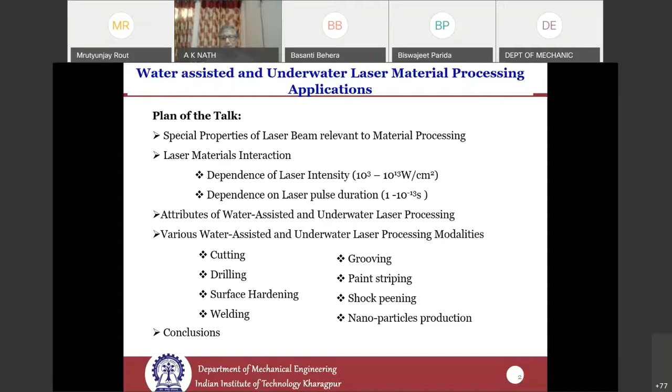The laser has become a tool of unprecedented precision and power, and because of that, it has become an invaluable tool for material processing applications in manufacturing industry.

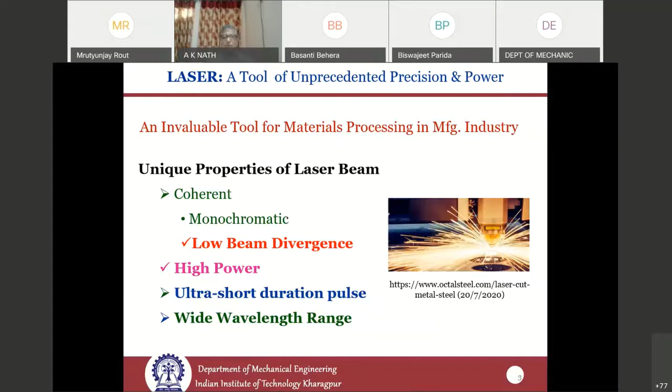The unique properties of the laser beam: many people know it is coherent and monochromatic. The spatial coherent property gives the laser beam very low beam divergence, meaning it doesn't spread much while traveling. You can get very high power, very short duration pulses, and lasers of very different wavelengths ranging from infrared to ultraviolet.

What is the significance of this? When we have such a laser beam and try to focus it with a lens of focal length f, the spot diameter generated is given by diameter equals 2f times the half beam divergence, where f is the focal length of the lens.

If you put in the typical values, the smallest spot diameter you can generate is of the order of the wavelength of the laser. For excimer lasers, with wavelength in the range of 0.2 micron, one can get a 0.2 micron diameter spot.

With an Nd:YAG laser, around 1 micron wavelength, the spot diameter will be 1 micron. With a CO2 laser, operating at around 10 micron wavelength, the minimum diameter at the focal point will be around 10 micron. So depending on the laser wavelength and beam quality, you can achieve very small spot diameters.

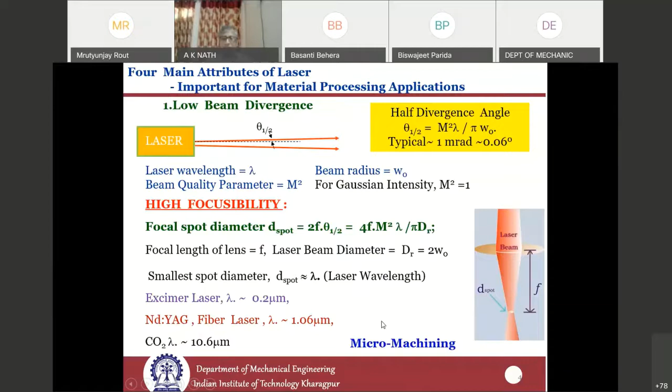Nowadays high power lasers are available in milliwatt range. The pointer we use for presentations is in the range of 0.5 milliwatt. Then you have got lasers ranging up to 10 kilowatt or more, tens of kilowatt, available commercially.

When you use pulse lasers, you can get pulse power in the kilowatt to terawatt level, with pulse energy up to hundreds of joules in a single pulse. Once you focus such high power laser with a lens, you can generate a focal spot diameter practically in the range of 10 to 100 micron minimum spot size, yielding power density at the focal spot in the range of 10 to the power 3 watt per centimeter square to 10 to the power 14 watt per centimeter square.

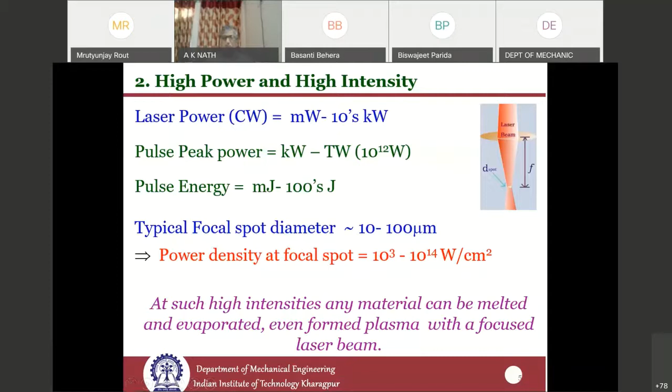There is no other energy source which can generate such high power densities. Lasers are available from continuous wave mode to different pulse durations. The shortest pulse duration practically generated and commercially available is around 10 femtosecond, that is 10 into 10 to the power minus 15 second.

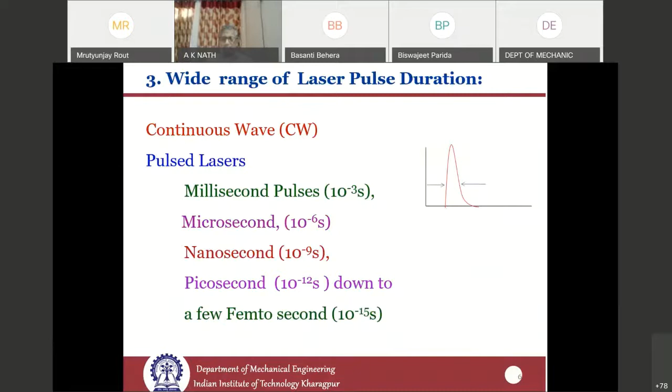Lasers are available at different wavelengths, ranging from ultraviolet lasers like excimer lasers, up to large varieties in the mid wavelength range. The most important lasers used for material processing applications, where reasonably high power and pulse energy are required, include excimer lasers, Nd:YAG glass laser operating around 1.06 microns, fiber lasers in the same range, titanium sapphire lasers operating as femtosecond lasers, and CO2 lasers. So CO2 laser, Nd:YAG laser, fiber laser, titanium sapphire laser, and excimer laser are the very important lasers for industrial applications.

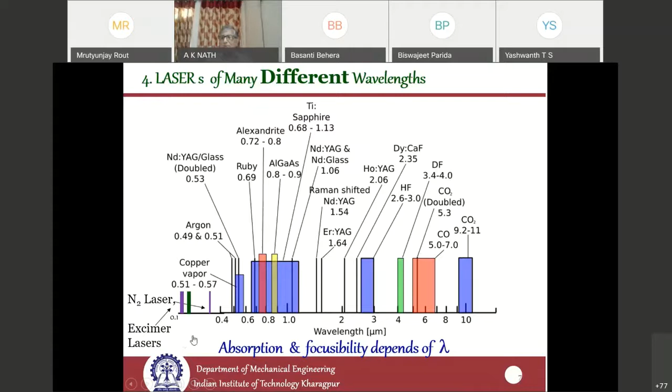When you focus the laser beam, depending upon the power density, you can realize various effects on a material. If the laser power density is in the range of kilowatt per centimeter square, relatively low, you just heat the material, realizing laser surface hardening and metal forming, without allowing the surface to melt.

If you go for higher laser powers in the range of 10 to the power 5 watt per centimeter square, you can do melting. This can be used for laser surface remelting, cutting, conduction welding, as well as surface alloying, etc.

When you go for slightly more power density, the melt material can start evaporating, and the vapor pressure generated can create a keyhole. Through this keyhole, you can realize deep penetration welding as well as drilling.

When you go to even higher power densities, in the range of 10 to the power 7 watt and more, the vapor coming out can form plasma. When the plasma absorbs the laser radiation, its temperature rises very high, so pressure also increases, generating a lot of shock wave. This shock wave can produce shock wave hardening, known as laser peening.

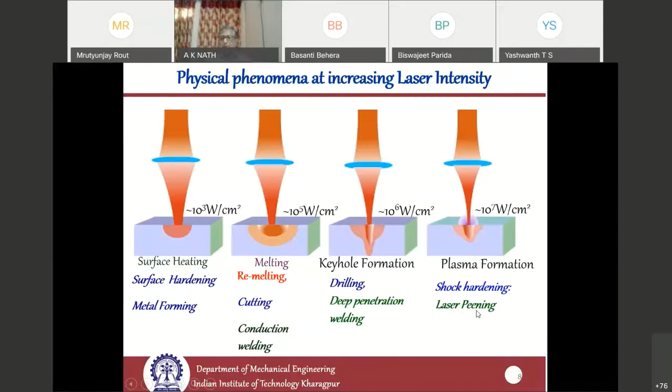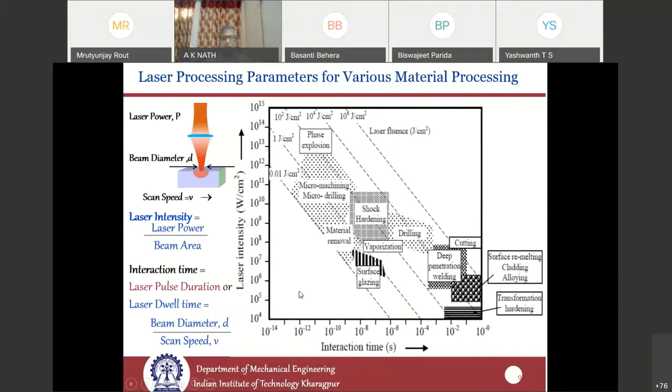Now, how does the laser beam interact with a material? To understand laser beam interaction and appreciate its dependence on laser intensity and pulse duration, let us see what happens when the laser beam, which is basically an electromagnetic wave, is incident on a material. If you consider a metal, it has a lot of free electrons.

These free electrons will be forced by the oscillating electric field of the laser beam and will start oscillating. As they oscillate, they collide with other electrons, sharing their energy, and thereby the electron gas system temperature increases. This increase takes place on the time scale of around femtoseconds.

These hot electrons, heated up to several hundred or thousands of Kelvin, then collide with the much heavier ions, which slowly gain energy from the electrons and share that energy, so the entire system gets heated up. This process takes place on the order of picoseconds or tens of picoseconds.

So if you see the ultra fast laser operating in sub picosecond regime, only the electron temperature is going to get heated up, and the ion temperature will be very less, because the ion will not be able to thermalize with the electron within the femtosecond time scale.

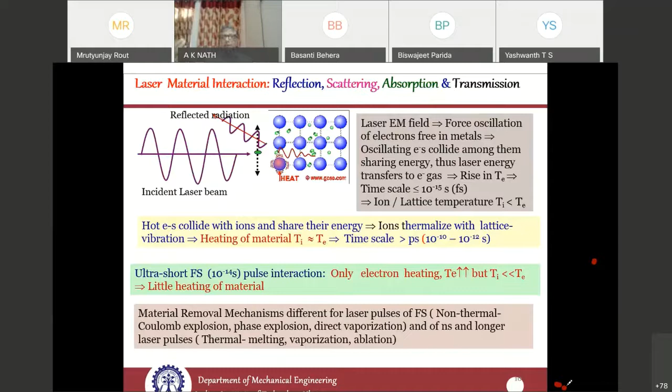But when you consider metal, where there is a lot of free electrons, the refractive index is complex, and it has got a real part and an imaginary part.

Depending upon this refractive index, reflectivity is given by this expression, and absorptivity is nothing but 1 minus R, the reflectivity, and the transmittivity.

In case of metal, which are opaque, the transmission is 0, so you get absorptivity in the material equal to 1 minus R.

So absorptivity depends on the complex refractive index of the material, and on this also depends the absorption or attenuation coefficient.

This alpha is a characteristic of both the laser and the material, given by 4 pi k by lambda, where k is the imaginary part of the component of the complex refractive index.

The inverse of this tells me how quickly the laser energy is going to get absorbed within the material. So it is known as the attenuation length, sometimes also called the optical skin depth.

In metal, the k value is usually large because there are a lot of free electrons available. Because of that, the reflectivity R tends to become almost 90% or even near 100%, and the absorptivity, 1 minus R, becomes very, very small.

And there the attenuation length is also very small, in the range of nanometers. So what does it mean?

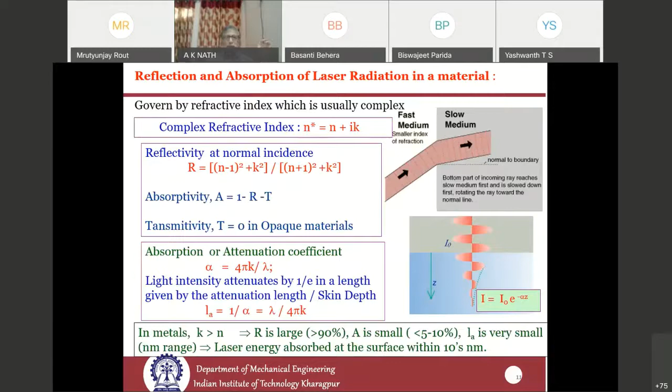Okay, so when we have got the dielectric material.

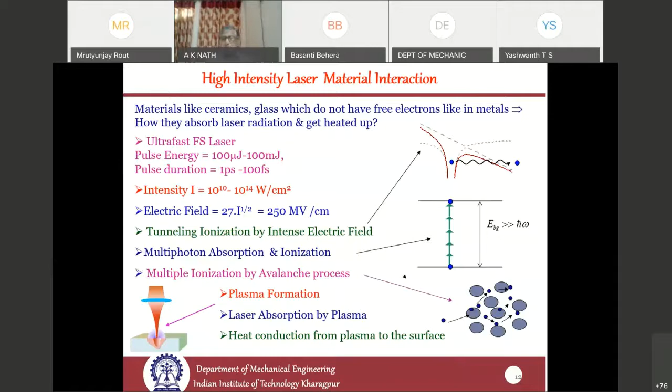But with a very short duration pulse, the electron system gets heated up in that duration, and slowly, over a timescale of tens of picoseconds, shares its energy with the ions and lattice, which then also get heated up. All of this happens on the femtosecond timescale.

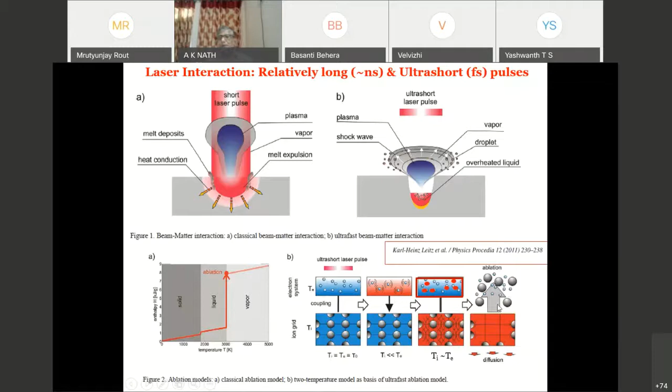There is no time for the material to undergo thermodynamic melting, so some amount of material that has been heated up to very high kinetic energy just leaves the material - what we call ablation or vaporization without melting. That type of effect can happen.

So if you see the effect of nanosecond and femtosecond pulses - with microsecond and nanosecond pulses, you see a lot of recast or molten material. But when you go to picosecond laser pulses and shorter, you don't find that effect of molten material.

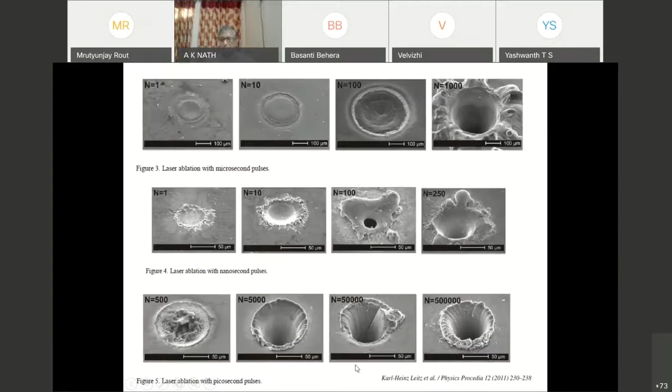How does the processing take place? As mentioned, the laser beam gets absorbed on the top surface, and the entire energy gets absorbed there, with heat conducted into the material. One can find out how the surface as well as the material heats up along the depth direction by solving the one-dimensional heat conduction equation.

From this, one can find out for a given pulse duration how the surface temperature rises and how it cools down. Along the depth also, you can find out how the temperature distribution takes place over time.

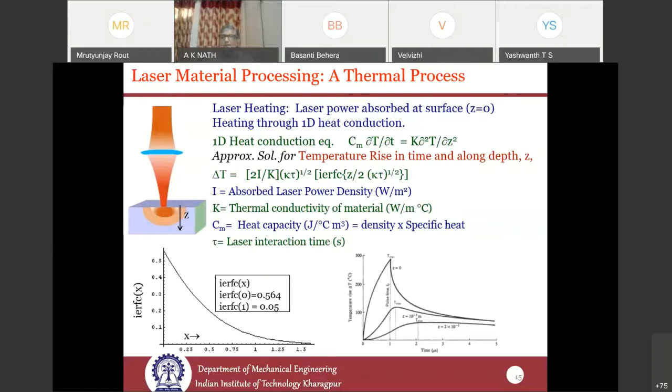But when we consider the ultra-short laser pulse, we know that only the electrons are getting heated up. So we have the electron heat conduction equation, and they slowly share their energy with the ions - this is the equation through which the ions get heated up.

So if you want to find the temperature rise of electrons and ions and the material removal, it becomes a very complex process. People have tried to utilize empirical relations taken from experimental information.

One can find that there is a certain threshold of laser intensity, or laser fluence, up to which the material gets ablated. So if you have an intensity or fluence F0 incident on the surface, one can find out the threshold depth up to which the material gets ablated.

This can be found from this expression - the threshold depth is where the intensity has reduced to the threshold value. So from this equation, taking the log, you can find the depth up to which the material gets ablated.

Here, our assumption is that the laser intensity heats the material and is absorbed at the surface, and up to a depth governed by the optical skin depth or attenuation length.

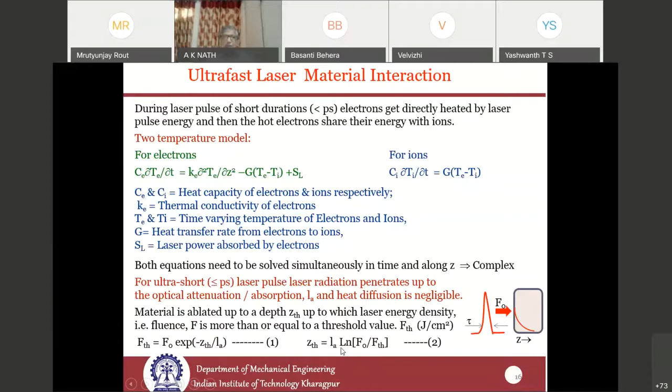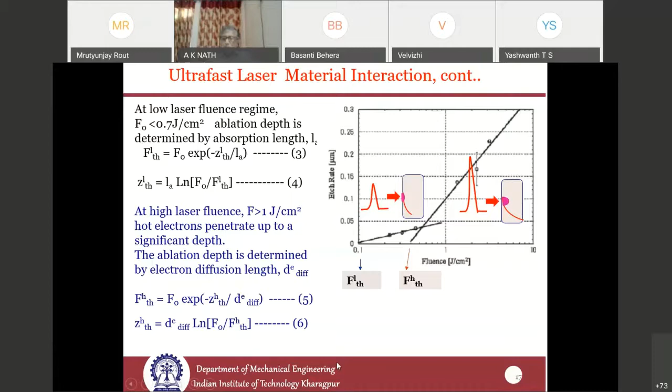When we consider very high intensities, we found there is a certain amount of hot electrons that cause diffusion inside the material, and this process is also very fast. Therefore, instead of optical attenuation length, the depth is governed by what is called the electron diffusion length. The expressions remain the same, only now we have a different threshold for high intensity ablation compared to low intensity ablation. Based on these experimental results, people have tried to theoretically model and find out, for a given laser fluence, what is the depth up to which material is going to get ablated.

However, when we consider normal laser cutting, drilling, etc., where the process is reasonably fast, not like femtosecond laser but still fast, the heat diffusion losses are very small and can be neglected. Then one can use the lumped energy or power balance equations, given here. This is the energy absorbed, and this is the amount of material which is going to get evaporated through vaporization. So this is the basic energy balance equation.

When we are talking about cutting, where the laser beam is moved with a velocity v, or distance v per second, you can use the energy power balance equations like this to determine how the temperature of the material is increasing, etc. You can find this out from this.

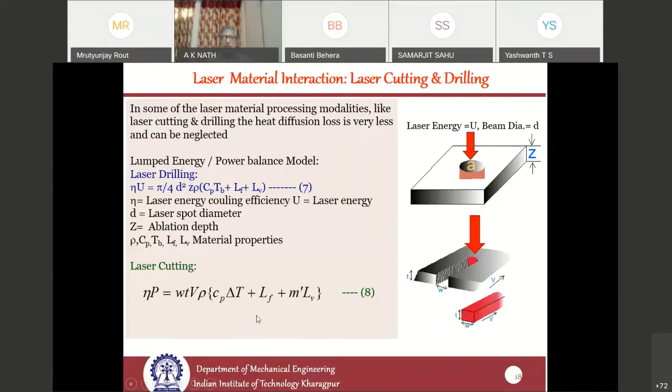Based on all these effects, one has tried to find out, for a given laser energy, how the ablation in grams depends on it. This line shows the lumped energy balance equation based on the previous equations I mentioned, for nanosecond and microsecond laser pulses, where the losses are very minimal. And here it is for femtosecond laser, where the phenomena are very different. People have tried to get information from experimental results and model it, using the three different models I discussed earlier.

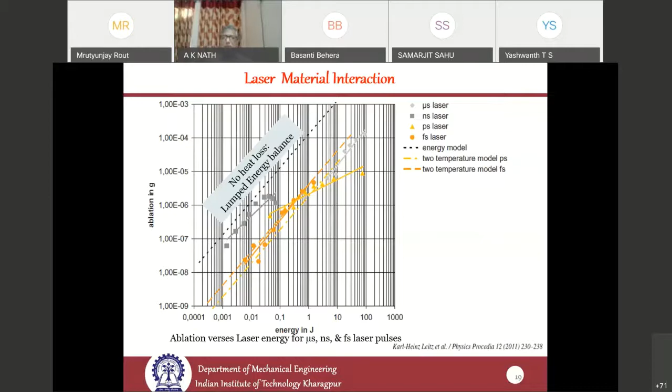Exploiting these effects, people have achieved thermal processing: cutting, drilling, welding, surface hardening, rapid manufacturing, that is additive manufacturing, laser forming, etc. There are also certain non-thermal effects, like in a dielectric material, a transparent glass, where inside the material you are able to generate features. This is laser shock peening. And this is the very advanced concept of two photon polymerization, through which you can generate nanofabrications.

This is the entire main building of our IIT complex, a 7-story building, made in less than a millimeter dimension, of the order of around 500 microns, seen under a scanning electron microscope. With almost 10 nanometer resolution, you can build this using the two photon polymerization effect.

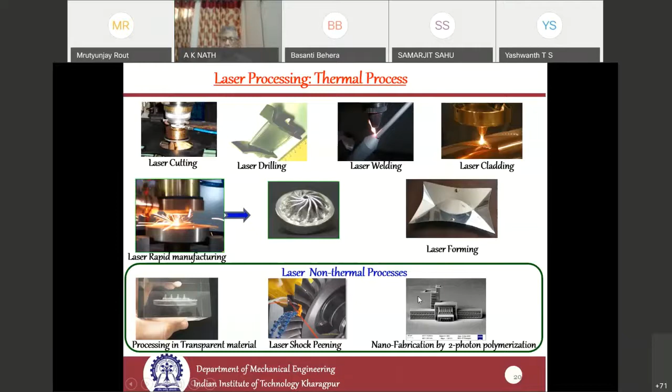Now, why is there a need for underwater processing? This need came from the fact that there are a lot of nuclear power stations where many components are flooded with water. Once the reactors are running, many parts become radioactive. And if, due to lapse of time, stress corrosion generates cracks, you need to repair them. Sometimes you have to cut apart the components, take them out, and rejoin with new components.

Also, the burnt fuel taken out from the reactor, in order to allow it to cool in terms of radiation, is put in a water tank around 30 to 40 feet beneath water, so that the radioactivity gets absorbed in the water. Now you need to dismantle these materials to take out the burnt fuel, process it, and store the waste material. How do you cut these materials, and do so underwater? These technical challenges drove people to find new methods and technologies based on lasers to do the processing underwater.

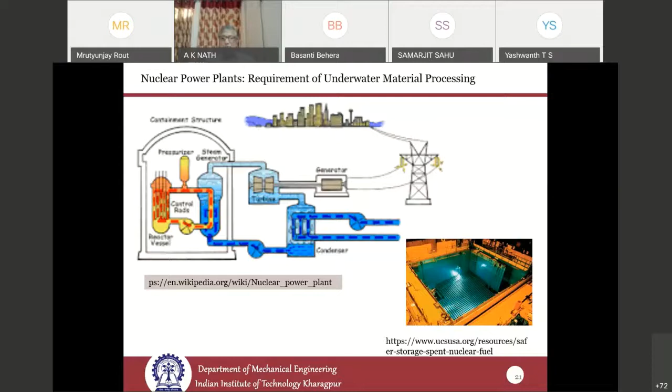So how does the laser beam get absorbed when it propagates in water? The CO2 laser gets readily absorbed in water; it has a very high absorption coefficient. Compared to that, on this logarithmic graph, the Nd:YAG laser, fiber laser, and diode lasers, whose wavelength is in this range, have relatively low absorption. The second harmonic Nd:YAG laser has relatively very low absorption. So one can directly use, inside water, the Nd:YAG laser, fiber laser, and second harmonic of fiber laser or Nd:YAG laser, to do the processing.

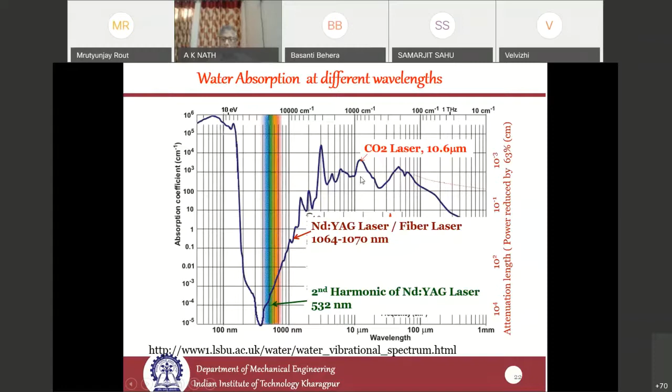CO2 laser has got limited applications, but as I go along, I will tell you how this has been exploited for use. In IIT Kharagpur, we have also tried to find out how the absorption of the fiber laser takes place when we focus the laser beam, because when the laser intensity at the focal point is very high, certain nonlinear effects take place and the water gets heated up. So we have tried to find out how, along with temperature rise, the absorption coefficient goes on reducing.

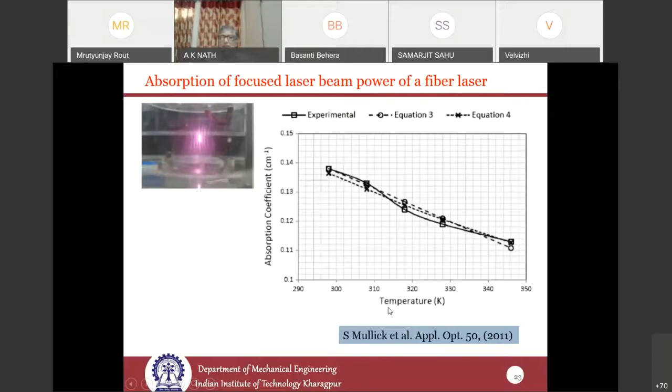Now, what are the attributes? What are the advantages of laser underwater processing? There are lasers like Nd:YAG laser and fiber lasers which have got very little absorption and better laser beam focusing. Because the refractive index of water is more than air, you get a smaller focal spot. There is also efficient cooling by the surrounding water.

The laser beam could be guided through the water jet. There is improved material removal by water jet because of high shearing force compared to gas jet, and it is used for cutting and other material removal processes. There is efficient material debris ejection by water vapor bubble cavitation effect, giving better laser processing quality because of the effective removal of debris.

Intense plasma is produced when we are using CO2 laser, and this has been also exploited in many applications, with enhanced plasma shockwave pressure due to water confinement. This is exploited in laser shock peening, which I will describe later. There is also reduced atmospheric pollution by waste gases and aerosols, because underwater, the debris or fumes coming out will be relatively less.

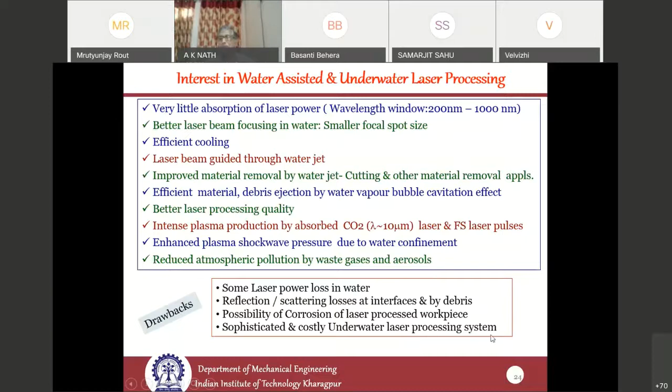There are some drawbacks. Some laser power loss in water takes place, along with reflection and scattering losses at the interface and by debris. There is a possibility of corrosion of the laser processed workpiece. Also, the underwater laser processing system is more sophisticated and costly compared to a gas assisted system.

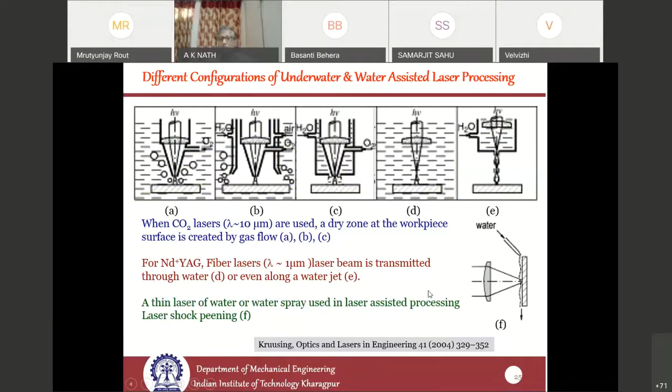And here, along with the laser beam, you are getting the water also, and we are creating the dry conditions and doing the weld processing. Here, it is inside the water, directly going through the water. And here you can see that the water layer is just put on the workpiece and laser beam is impinged on this. So these are the different ways through which it has been done.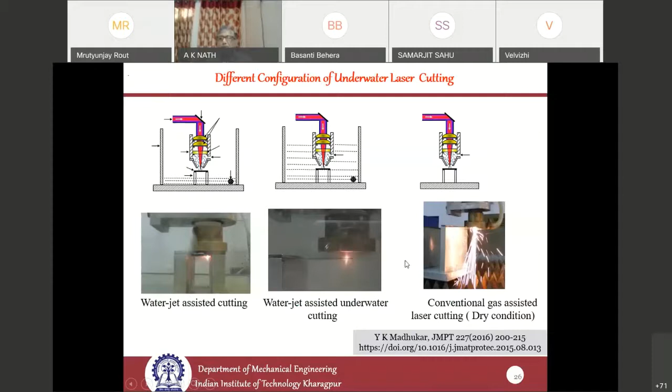So in IIT Kharagpur also, we have tried to develop water assisted and underwater cutting, as well as normal conventional gas jet assisted cutting and processing, and tried to compare the effect of all these processes. Here I will just try to demonstrate how it works. Let me see whether it works here or not.

You can see this is the normal gas assisted processing, where you can see that there is a lot of debris created, and noise and plumes are created.

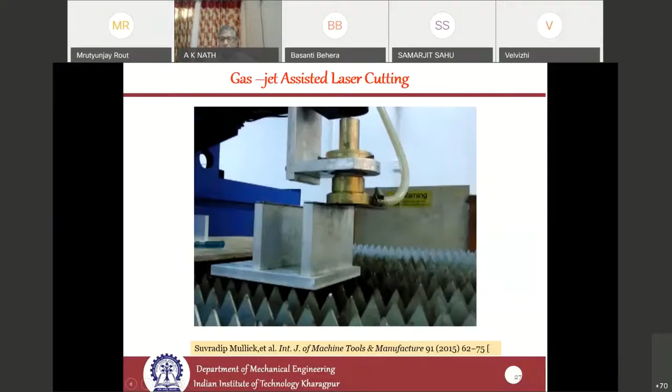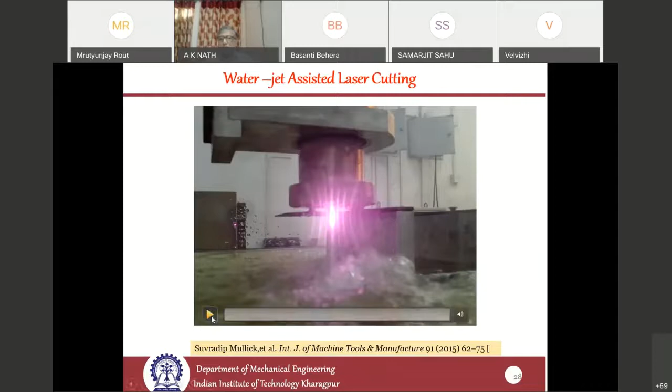Here it is the water jet assisted cutting. So the water is coming and it is removing the molten material.

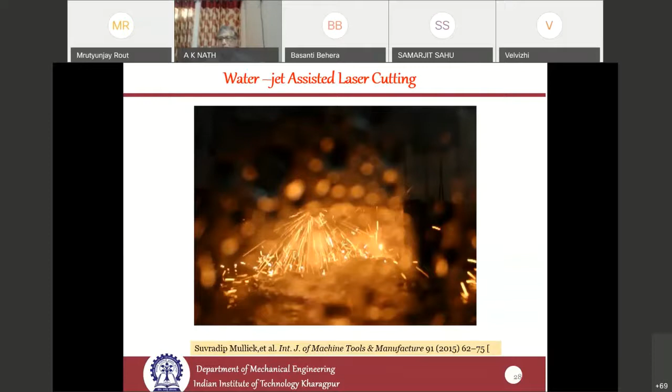Any difficulty, sir? Hello. Yeah, any difficulty? A K Nath sir, is there any problem? Yes, slide shifting was a little problem. Let me see.

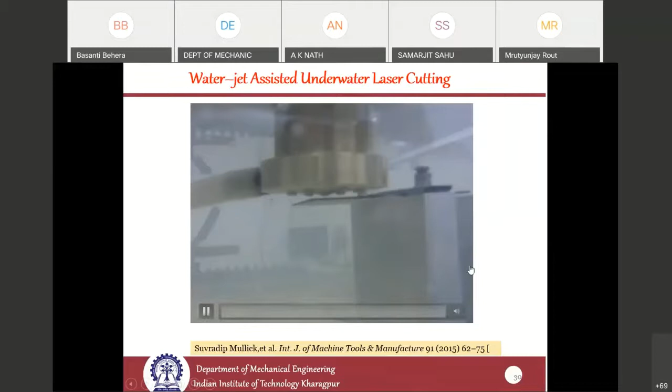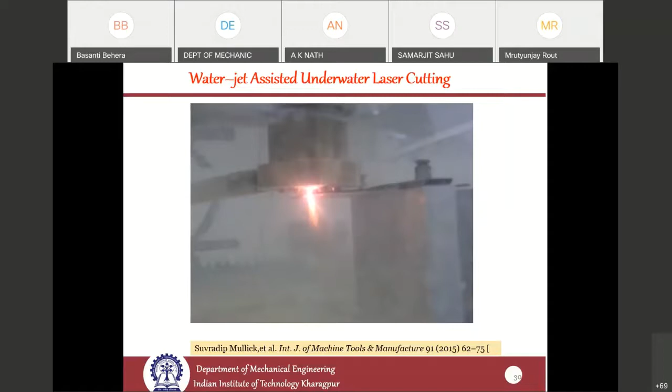Hello, Ashish sir, are you able to hear us? Yes, sir, we can hear you. Are you able to see the slide? No, sir, not right now. Let me share it again. Yes, sir, we can see your slides now. I'm trying to expand it, is it visible? Yes, sir, it is visible. I hope you were able to see this slide in play mode. Yes, sir, it is running. Again, some problem came, might be the bandwidth is low, it is not able to take video. Okay, I will go for the rest of the things. Are you able to see the slides now? No, sir, not right now. Oh, again it got disconnected.

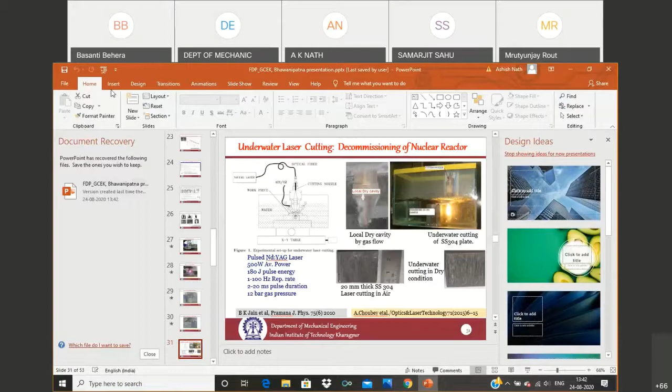Are you able to see this? Yes, sir, we can see that. Okay, so now I'm not going to show any video. So this is underwater cutting for decommissioning of nuclear reactor components.

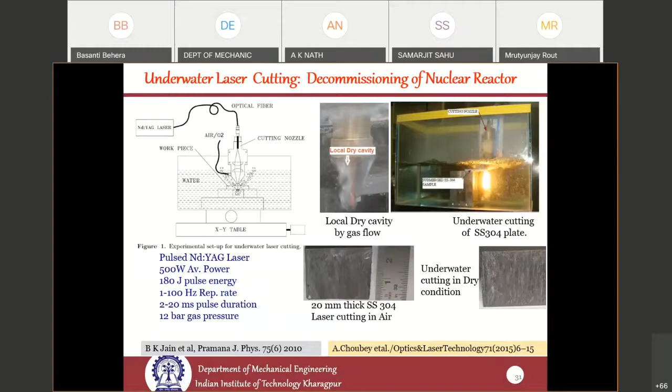As I told you, most of the time when CO2 lasers, which get readily absorbed in water, were available in the late 90s, by creating a local dry cavity with the help of a high pressure air or oxygen atmosphere, the laser beam used to be directly incident on the workpiece kept underwater and realize the cutting. This was being used in RRCAT Indore for the Indian nuclear program, these developments were being done. This is reported in Japan, how they are cutting even up to 100 millimeter thick blocks underwater by creating a dry atmosphere.

So here you can see the top cut, which is reasonably very small, and this is the bottom one. This is from the side. So from 80 to 100 millimeter material from the side, you can see how the cutting has been realized.

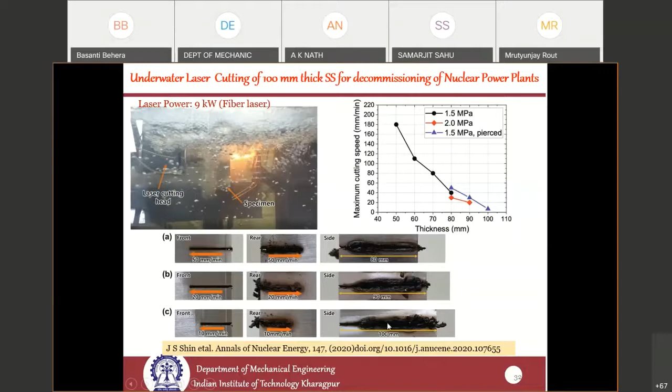Sometimes in the early 2000s, one interesting development was done when high-powered fiber lasers and NdYAG lasers were developed. Through a very fine water jet whose dimension is in the range of around 50 to 100 micron, the laser beam is guided through this, and then it is allowed to fall on the workpiece to do the cutting. Since the refractive index of water is 1.3, more than air whose refractive index is 1, at a proper incident angle, when the laser beam is focused, it can be guided like a waveguide and carried without much loss.

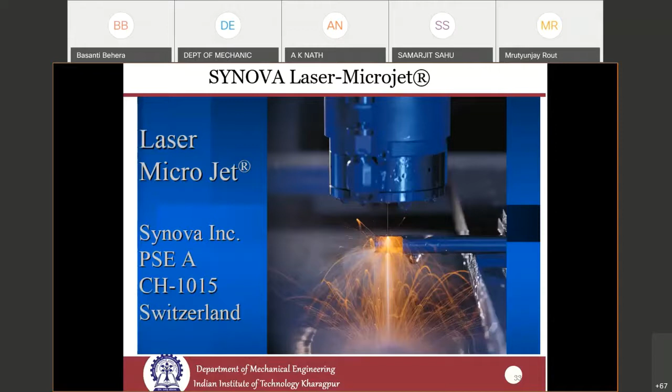So this was being developed and used for cutting many thin materials, slicing thin materials to create very good quality of cutting. Here you can see how the laser beam is guided through the water jet, and this is the laser beam focused. This is the water jet which is coming, and from here the laser beam is guided and it is going to cut. The main advantage of this is that water causes cooling, very efficient melt expulsion, and you can have long focal distance, because usually the focal point is limited after the lens, but if it is focused, it maintains the same focal dimension along the fiber water jet till it is incident on the surface.

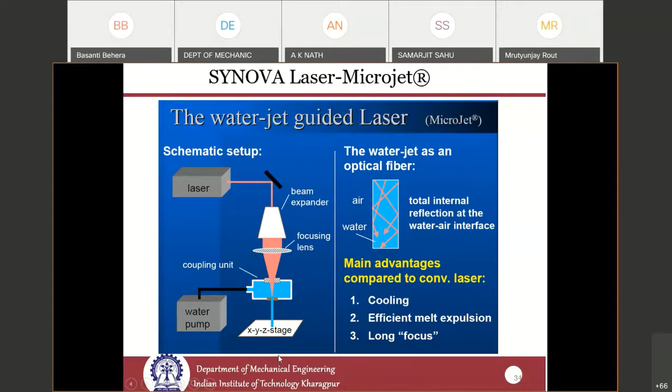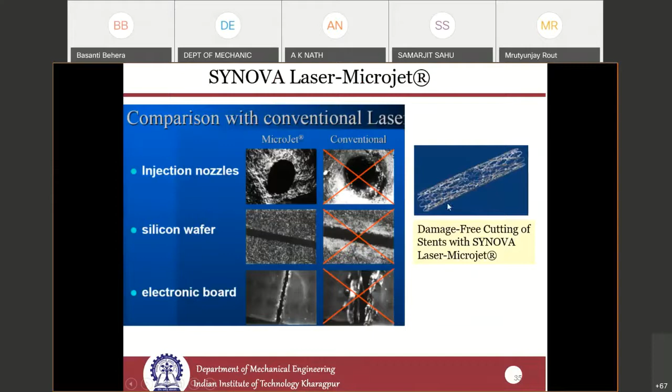So here it shows how good quality microjet processing can be realized in silicon wafer slicing, or creating the injection nozzle for petrol engines. And the other is stent cutting. One can use thin steel or tantalum sheet or tube to finely cut, without any burr or any microstructural or heat affected zone in the tube.

And then we, in IIT Kharagpur, developed underwater water-jet assisted cutting, and we could also create very good quality of cutting by this method, which we developed using our high power fiber laser.

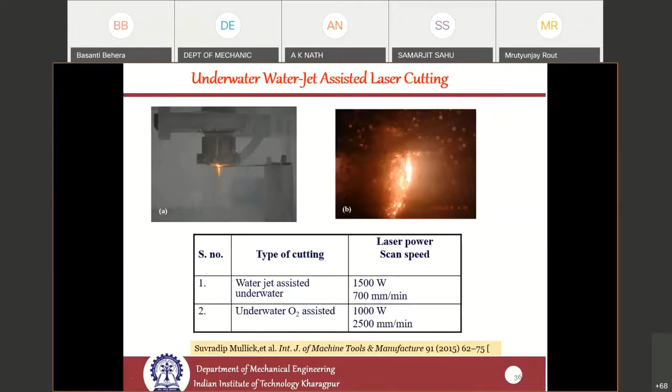Now, when the CO2 laser was being used, this has been used to process glasses. The glass absorbs the CO2 laser beam, and also the CO2 laser beam gets absorbed in water. So in order to process the glass inside water, high power lasers have been used. When the high power focused CO2 laser is propagating, it gets absorbed in water, and the water gets vaporized, and the water vapor, when it comes out, produces a keyhole.

And then with this, the laser beam is penetrating in and then reaches the glass surface. On the glass surface also, the CO2 laser gets very readily absorbed, and then with that you can do the processing.

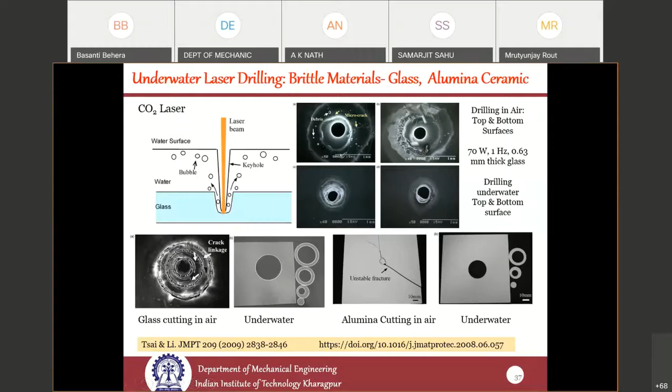Compared to air, where it generates a lot of thermal cracks when you are doing laser cutting, in water, with the help of a CO2 laser, you can generate very good quality cutting without any cracks. Here, the alumina ceramic has been cut in air - you get a lot of thermal stresses and fracture. But when you do it inside water, because of the cooling effect, you can do the cutting without any cracks, and get good quality of cutting.

Here, laser drilling has been shown. In one of the experiments, they tried to see what is the mechanism. The mechanism in laser drilling in air is actually melting, vaporization, ablation. But here it has been seen that in addition to these effects, you have got a lot of liquid jet induced impacts, which also try to remove the material and realize the cutting. So the process becomes much more efficient.

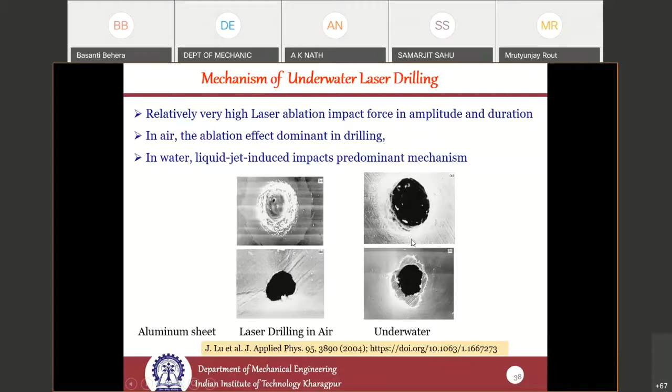Here, with the help of a femtosecond laser, they have tried to do, in presence of water spray, what is called micro hole drilling. This one is without water jet spray. Here with water spray, you can get very good quality of hole drilling, micro hole drilling. A femtosecond laser of 790 nanometer has been used to do the micro drilling of silicon with water spray assisted.

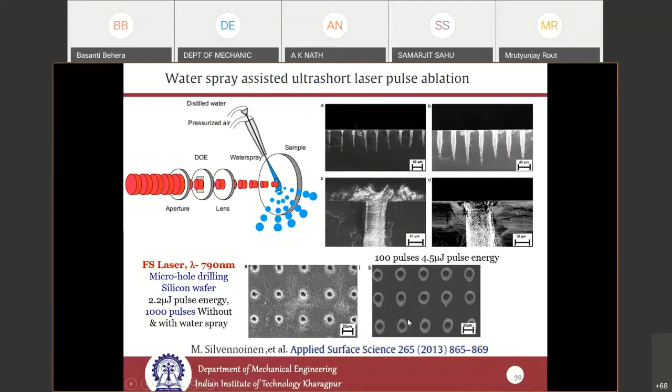Similarly, with the femtosecond laser, scribing and grooving has been done in silicon and steel. You can see that when you do it in air, this is the quality you get. When you do it with water jet assisted, you get very good quality. The water vapor which is generated because of the high intensity laser removes all the debris and melt recast. There will be no melt recast and you get very good quality material removal.

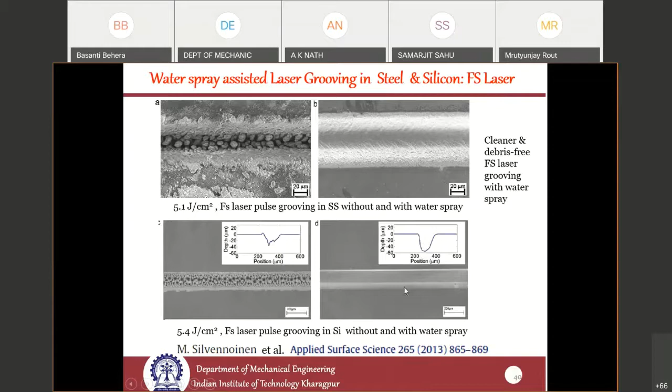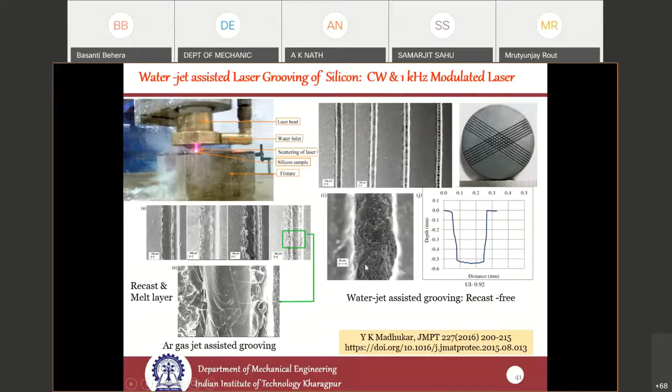Here at IIT Kharagpur also we did work with a CW laser and a laser operating at 1 kilohertz modulated power, and we could see that compared to air, where we get a lot of recast and melting, when using high pressure water jet assisted grooving, you get very good quality grooving done on silicon wafer. You can get very straight walls, clean, without any melt material or recast material left on the surface.

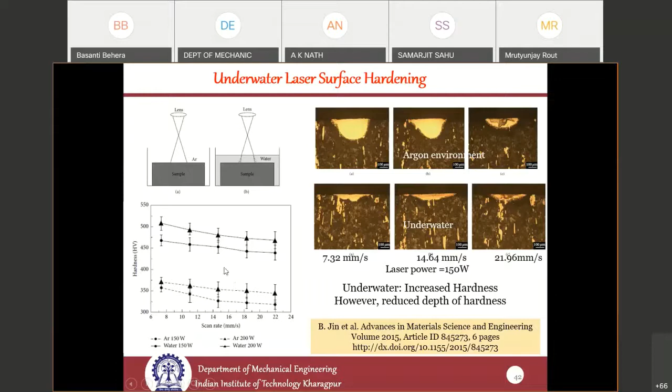This shows underwater laser surface hardening. When you use underwater laser surface hardening, you depend on fast cooling in the bulk material. Inside water, the cooling effect becomes much more rapid, and therefore the micro hardness generated is much higher compared to what you can generate in air. These two graphs show micro hardness in air and inside water. Though the depth reduces because of absorption of laser power in the water, and therefore depth reduces, the magnitude of micro hardness increases.

This is direct underwater laser welding. Up to a few millimeters inside water, you can directly do welding and get very good quality keyhole welding. But if you go beyond 1 or 2 millimeters, you find that the laser beam gets absorbed and creates a lot of plasma and plume. So the laser power cannot reach the surface if the water depth is more than 2 millimeters. Therefore, you get very poor welding. Up to 1 millimeter, you can get very good quality welding.

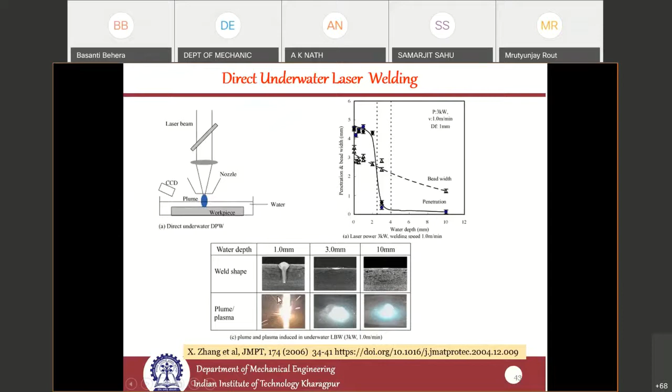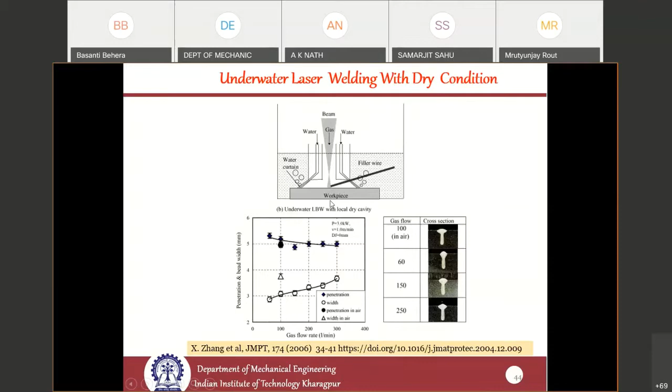Because of that, usually welding is done by creating dry conditions, either by putting a water curtain and then a high pressure gas jet, and then you can do power filler wire welding, etc., in order to weld thick material underwater. This has been used in the nuclear industry, as I mentioned earlier, and they have tried to do cladding by wire deposition as well as wire-fed welding of thick material up to 10 millimeter thick, by making a V groove and then realizing the welding.

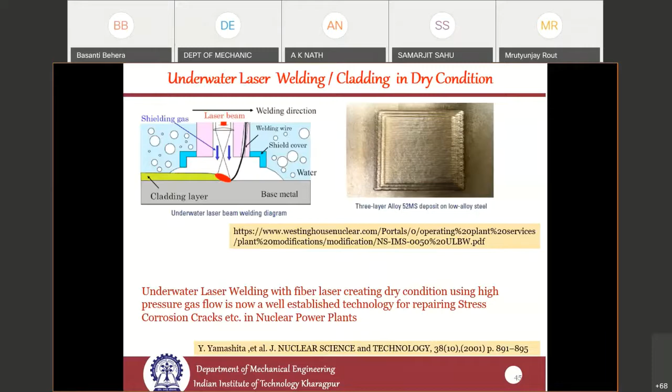Now there is another application where people are trying to see the effect of water: paint removal. In the aerospace industry, after a large number of takeoffs and landings, one needs to check the body, important parts of the jet or aircraft, to see whether any fatigue cracks have grown.

Now, these fatigue cracks or micro cracks may not be seen in presence of paint on the surface. So after a certain time, certain number of takeoffs and landings, all jet planes and aircraft are called into the hangar, and there the paint on the surface needs to be removed without damaging the metal surface. Here the laser beam is being used to remove the material.

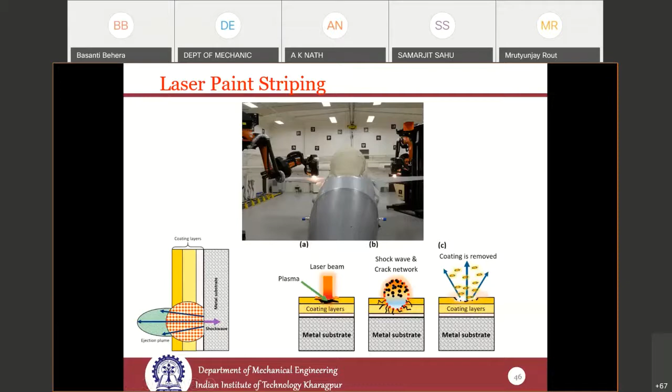Now, many times it has been seen that when you try to use an air or gas jet, there is a lot of burnt ash from the paint that remains. That needs additional mechanical means to remove these ashes. But when you use water-assisted paint removal, you don't need any secondary process to remove the ashes, and you can get very good quality paint removal without damaging the surface beneath.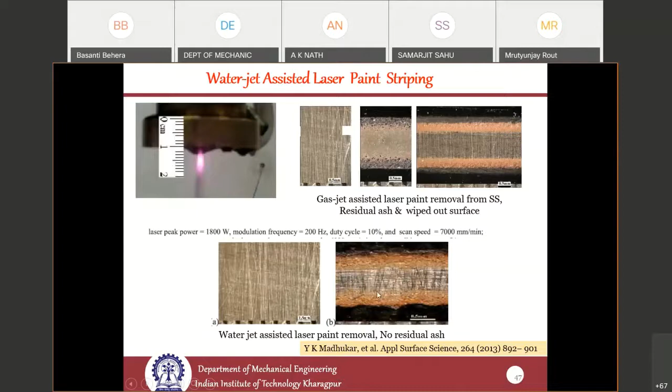Now, when the laser beam is incident, the laser power density is controlled in such a way that it is not absorbed in water, and that limit is around 6 gigawatts per centimeter square. So if your power density is below 6 gigawatts per centimeter square, it is directly passed through the water and then incident on the coating.

This black coating can readily absorb this laser power, and therefore it gets heated up, forms fume and plasma, and this plasma tries to expand, generating a lot of pressure. This expansion is confined or restricted by the water layer. Therefore, in comparison to air, in water it generates four times more shock wave or plasma pressure. This pressure propagates inside the material, and when it increases the compressive stress beyond the dynamic yield strength of the material, it causes plastic deformation, introducing a good amount of compressive stress.

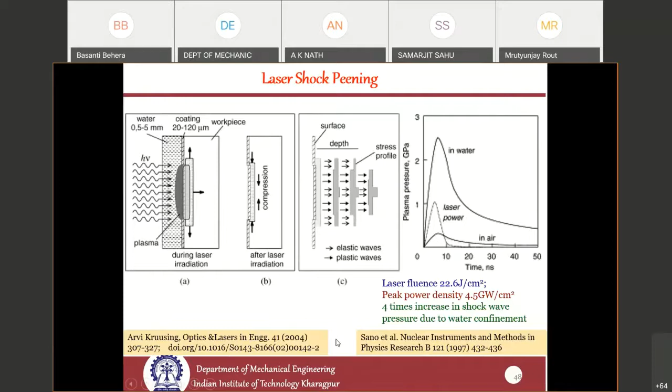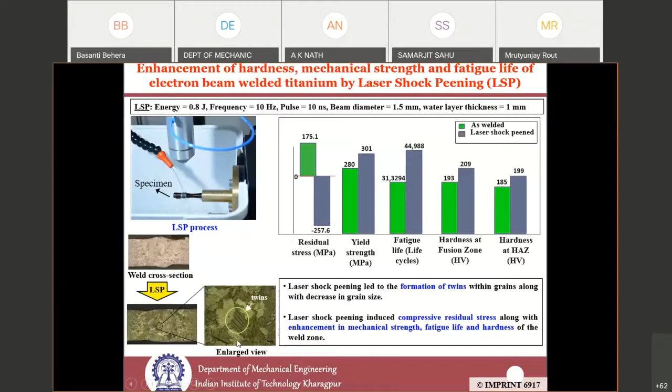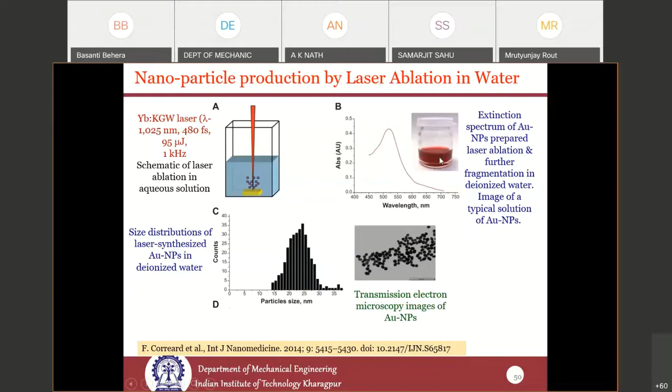So with this, we reach the end of my talk. What we discussed is that high power laser beams, especially Nd:YAG laser, fiber laser, and diode laser, can be directly taken underwater, transported through low-loss optical fiber, to do a lot of processing.

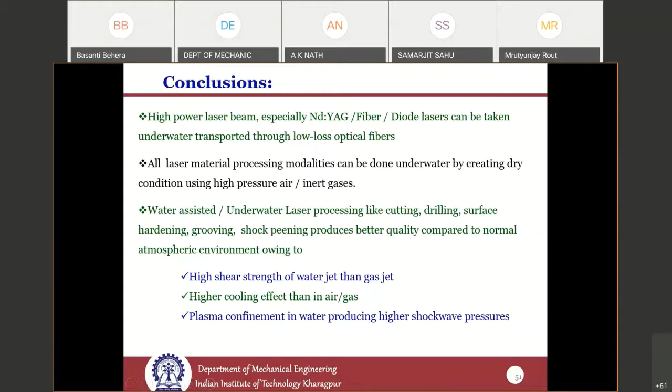All laser material processing modalities can be done underwater by either creating dry conditions or assisted by water jet. You can get the advantage of water because of its higher shear strength compared to the air jet, higher cooling effect compared to gas or air jet, and also confinement of the plasma pressure inside the water. So all these effects can be exploited in order to realize better material processing assisted with water or underwater. I'd like to acknowledge my colleagues, some of whose results I presented.

Yuvraj, who is now assistant professor at IIT Indore; Dr. Malik, assistant professor at IIT Bhubaneswar; Dr. Sagar Sarkar, who is working as a senior scientist with me presently; and my research colleague, PhD student Anshuman Chattopadhyay. Now, at the end, I would like to thank you for your very kind and patient attention. Thank you to all of you.